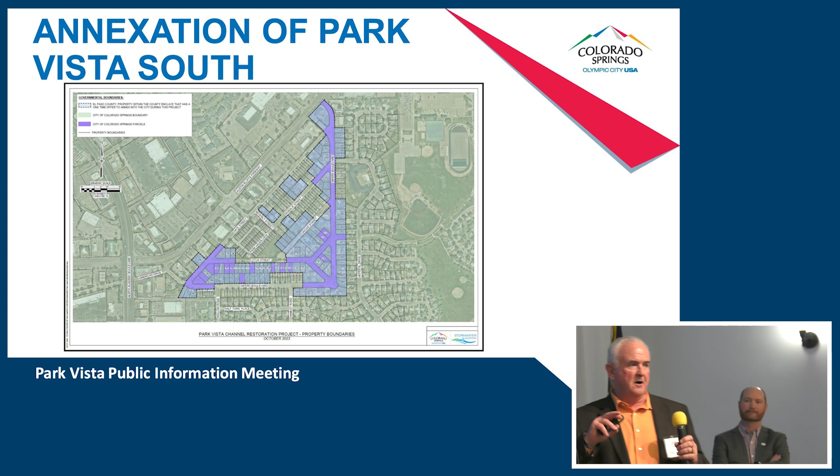This whole area that's colored, that's the enclave area. That's the area that's in the county itself.

So why annex? That's a good question. Typically you annex to get city services, such as police and fire. You get access to city utilities, water, sewer. We will maintain the roads. That's part of the reason why we're annexing it in.

There's possibly other reasons that you may want to annex now versus later. Some of you probably are on a septic system, possibly have a well. Either one of them could go bad and you're forced to hook up to city utilities. If you annex along with the city, we're paying for some of that cost for you instead of you having to pay it on your own.

Again, like I said, I want to mention, it is all volunteer. So don't think we're forcing you into anything that you don't want to do. Contact me and we can walk through the whole process. This is a one-time offer. You've got till September the 1st of next year to decide, and we'll go from there.

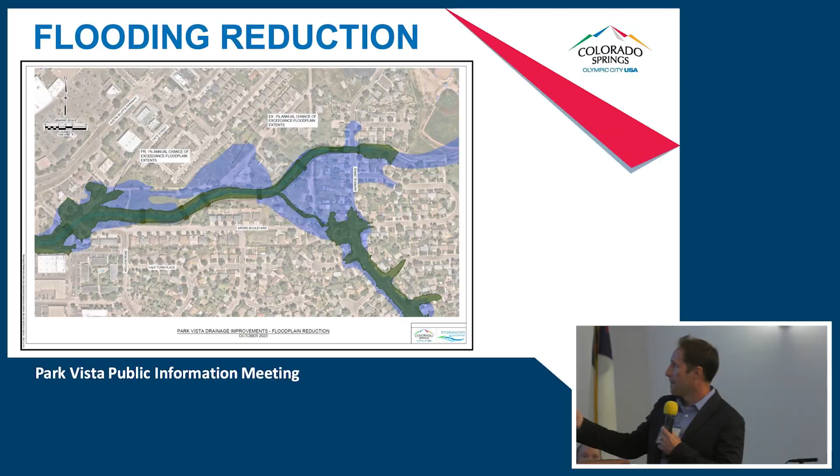That's what I had, and I'm going to turn it over to our design engineer to talk about the design. Thank you.

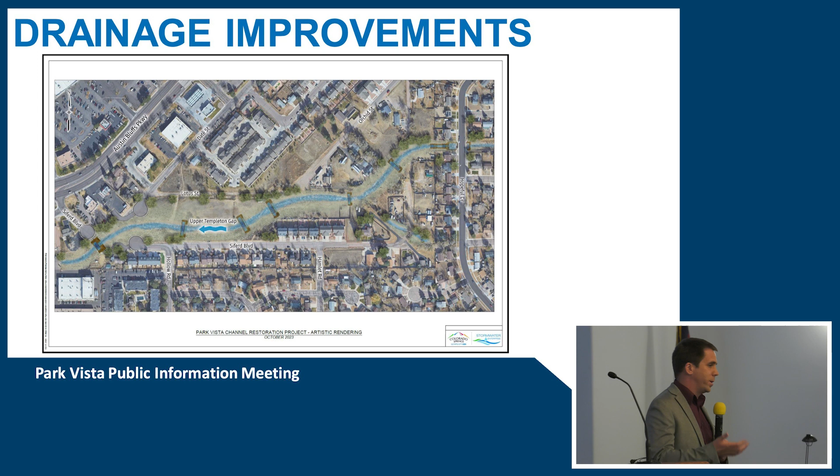So flooding on the roads and stuff, that should help because it'll start moving away as it goes through, but there won't be installation of inlets and storm drain networks in the roads themselves. So we'll be making a constructed channel to show some examples, and then we'll have these concrete drop structures that are really kind of a feature and an aesthetic element, and I'll show some examples of those as well.

We really want to make it a feature and an element and an asset to the community, because it only floods for maybe an hour or two, maybe once or twice a year. So what is it doing the rest of the time?

So we're going to be removing the eroding banks where we have sheer high cliff areas. We know there's a lot of rubble and debris concrete that's just been placed there over time. So we'll be removing all that, and we'll be grading out nice slow banks that you can walk down and vegetating it with natural grasses and natural plants.

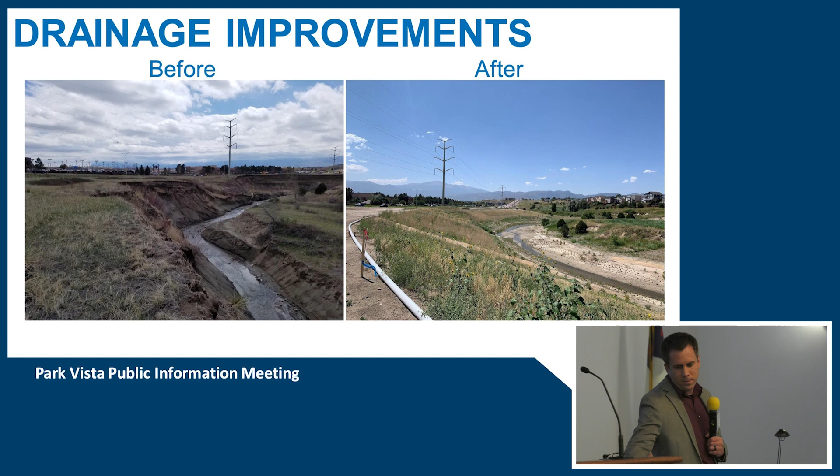So we sculpt them to look like bedrock. We even had a dye added to it, so it changes the color to kind of blend into the environment. So we really try to make it look like a natural featured element.

And then we work with our contractors. Sometimes they get really fun and have some excitement with it, and they'll put tree branches and log stumps to add some variability. So each drop structure is unique. At Cottonwood Creek, they even got really unique and put in the elusive turtles that are in Colorado. So they have fun with it and try to create some Easter eggs for each of those structures as they go through.

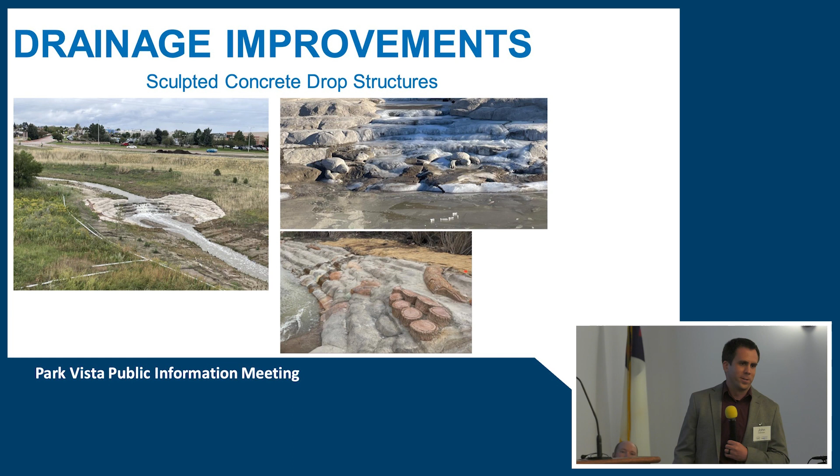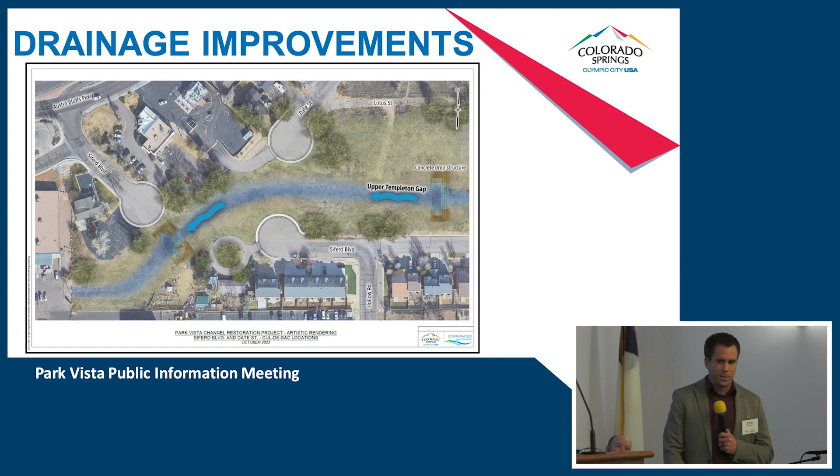At the upstream end, we know that Hopeful Drive, that bridge, is currently undersized. So we'll be opening up that bridge to be a little bit wider. That'll help the flood conveyance go through it and not be backed up. I think we've talked with some property owners that have mentioned they've actually been flooded out a couple times in recent years through there.

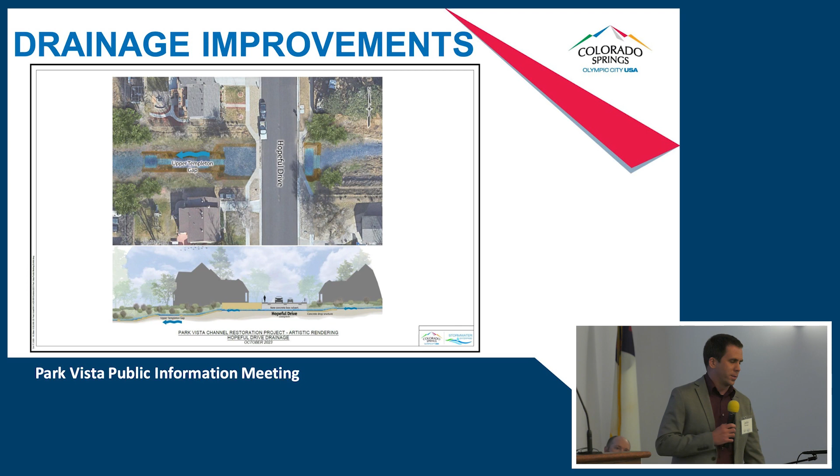So by opening up that bridge and widening it a little bit, we'll be able to pass that flood conveyance through the bridge, and that'll go downstream, so it will no longer be a risk of flooding. That's really what's going to help provide that flood risk reduction and take a lot of people out of the floodplain, so you won't have those flood insurance premiums that Richard was mentioning a little bit earlier.

So we do recognize that a lot of the proposed channel improvements are going through some private property, and our team has reached out to most property owners. If you haven't been reached out to and you believe you'll be affected, feel free to talk to us. If you have been affected and reached out to or sent a letter, we can discuss the options.

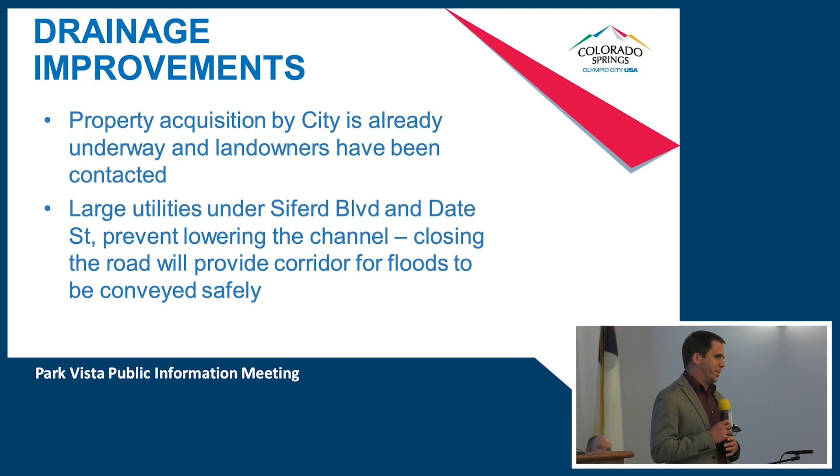The other thing we wanted to talk about is at Siferd and Date Street, there are significant utility lines underneath that road: a 20-inch high pressure gas line, a 10-inch high pressure gas line, and a 36-inch water line. Those are major utilities that are very expensive to relocate, as well as very dangerous, just because they convey a lot of stuff. So that's one of the primary constraints we have.

I know some people have talked about building bridges. That was one of the first things we looked at—really lowering that channel, seeing if we could put a culvert in or some alternative to keep that access open. Given the constraints of those utilities and the cost to relocate them, that was something we just weren't able to do given our budget constraints.

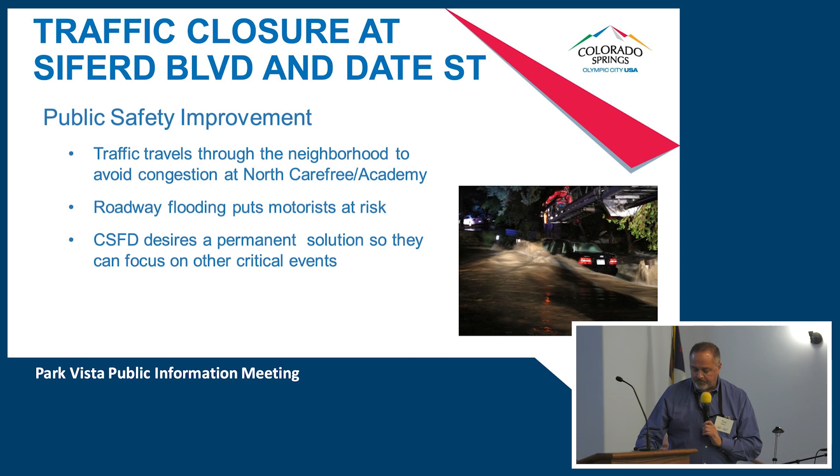The earliest count we could find for the neighborhood was from 1995. It was more of a concern with a traffic signal at Hollow and North Carefree. Researching that, the reason it hasn't been signalized is exactly what's going on today—we have the cut-through. If you signalize that intersection, you're going to get even more. So it's been looked at, signal warrants have been conducted, but we don't want to encourage more cut-through in the neighborhood. There are 1,000 vehicles cutting through, as I mentioned earlier.

If we're talking solutions and the neighborhood traffic management program, we do have a toolbox of solutions. The number one solution to stop cut through traffic would be to close the road, and that's what this project does.

In closing a road, we need to look at what are the impacts. What happens if we do close this road? We need to look at that because are we creating another unsafe situation? Are we going to push traffic over to Hopeful? What does it do to Academy and Half Turn? So those are the things we looked at.

I don't want to seem like we don't know all the answers, okay? So please, you got to give us feedback. Of course, we do our analysis, we look at it, and we make a lot of assumptions, but that's why we do the Q&A, and that's why we do this process, because you guys live here and we don't know it, so we're going to need this feedback. It's a listen and learn for us too.

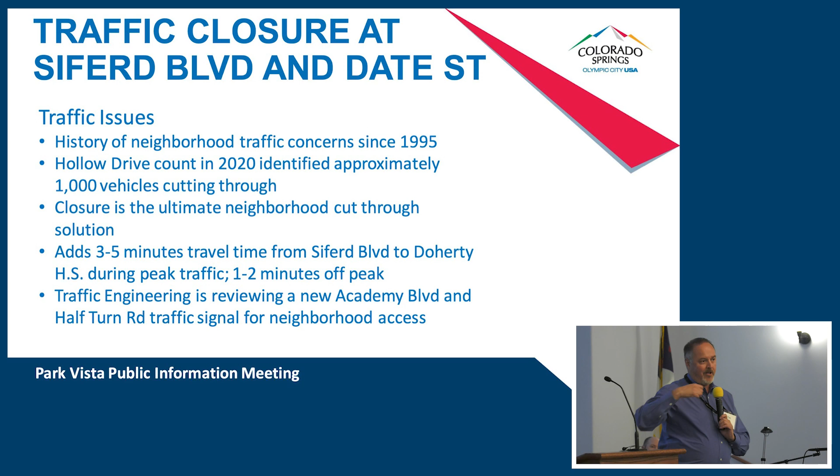And then I mentioned this, that we're looking at Half Turn and Academy when we know there's going to be impact there. Just because we close Siferd, that doesn't mean people are automatically going to stop trying to find shortcuts. We do feel that Half Turn and Hollow will still try to be a shortcut, so people don't go all the way to North Carefree. We need to look at that.

We feel a signal at that location is a good solution to improve safety for the access, because now you don't have the Siferd connection. So now you're going to be going from Academy, Half Turn, and into the neighborhood. And you don't have the protection of that signal. So that's something we want to do with this project.

I don't want to promise it. I can't promise it tonight because we still need to do our investigation of, like, there's a driveway across on the west side of Academy. We got to look at our right-of-way impacts. Are there utilities in the way? Is there an obstacle that would preclude us from doing that? We want to do it. I don't want to promise you, but we do want to do it. We're going to look into that as part of this project.

Could you step aside so I could take a picture of that? I can't see it. Oh, how about I could come to this side. Okay. Oh yeah, and that's right.

And these slides, actually the presentation will be on the project website. Is it on there now? Okay.

This is the map of the area. We did have Hopeful Drive on here also, showing that we are looking at that, but we took it off because last thing we want to do is announce to the rest of the city, hey, this is another shortcut. We're addressing this one, but now there's this other one, and we don't want to have that announced to the rest of the city.

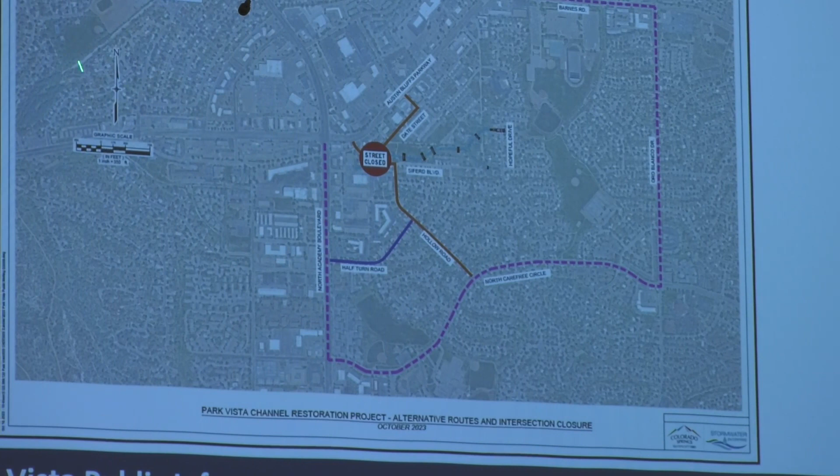And then, of course, this is the cut-through pattern right here. You can see how that is much shorter than going all the way this way and dealing with the signal at this location or going this way here. Even though that's the travel pattern we want the rest of the city to take if they're going to North Carefree.

This project helps us correct that. We feel this signal here will help make it a safer access to the neighborhood.

And I can tell you, we took it off, but Hopeful Drive is on our radar. We've been doing traffic studies on that the last couple years. It meets our threshold for intervention, so this project actually helps support us doing something on there. The bridge on Hopeful Drive is a great opportunity for us to do some type of traffic calming feature.

But let me tell you, regardless of this project, we were coming to address the traffic issues with the neighborhood. I just happened to lose a staff person, actually two staff people, about a year ago. I've rehired, and now there's two projects for us to initiate. One is Hopeful Drive, and the other one is in the Falcon Estates area. I'm not going to tell you that road because I don't want you to cut through on it.

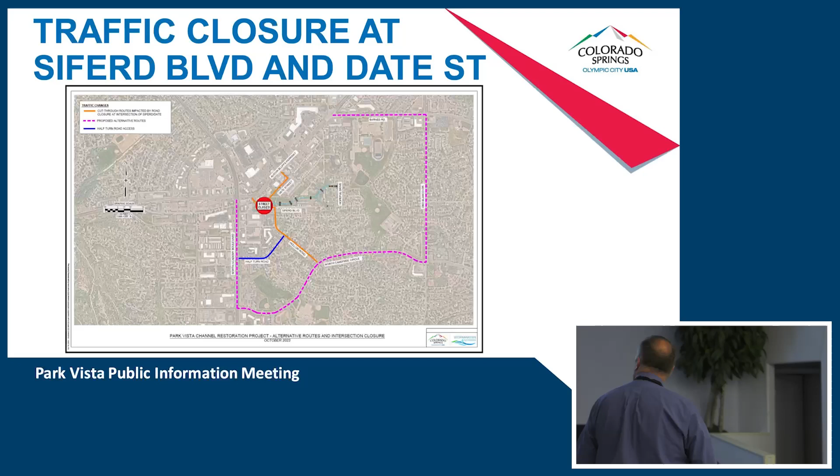Got to be on the website, right? No, not yet. But it's nice that this project is here, and this is a crossing point for us to start looking at that.

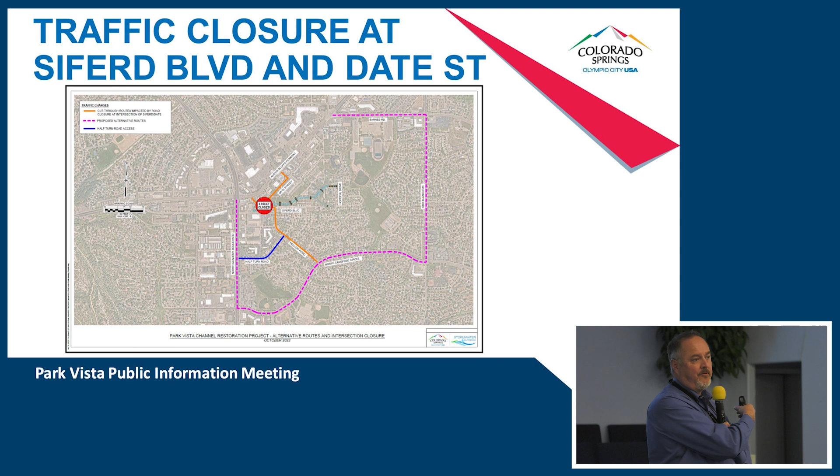Now, when I start looking at Hopeful Drive, and I don't know how many people are here from Hopeful Drive, but there will be a different public process for that. It sounds like we may be ahead of actually this project, because this one's going to take a little while longer, but we're going to start the Hopeful Drive process now. If there's a bridge improvement or traffic calming feature, of course that'll have to wait, but there's other actions we can do to address that. So there is another process coming for Hopeful.

This one really addresses the Siferd. We're trying to make it safe for access to the neighborhood. It's a little bit of inconvenience, but tell us your feedback, because we need to know. I don't live there, and you do, so please share your information with us.

Well, you know what we're looking at. I think I just mentioned most of this. The cul-de-sacs will be city standard. Of course, the closure is the ultimate cut-through solution, because now you've eliminated that opportunity. And then Half Turn—sorry, I wasn't advancing my slides.

Okay, with that, I'll turn it over to Fire.

Good evening, everybody. My name is Lieutenant Eric Rudinger. Sorry I was a little late to the party, had a few things going on this evening. So the reason that Adam wanted us to come and speak, and talk, was we realized that we've got this situation out here.

This area floods, you guys are familiar with that. We had some gates installed a few years ago. Yes, that was something that we took to the city and said, hey, we need some help. I know those gates haven't always been the most user-friendly for all of you, but they have been user-friendly on our side, and I want to explain why.

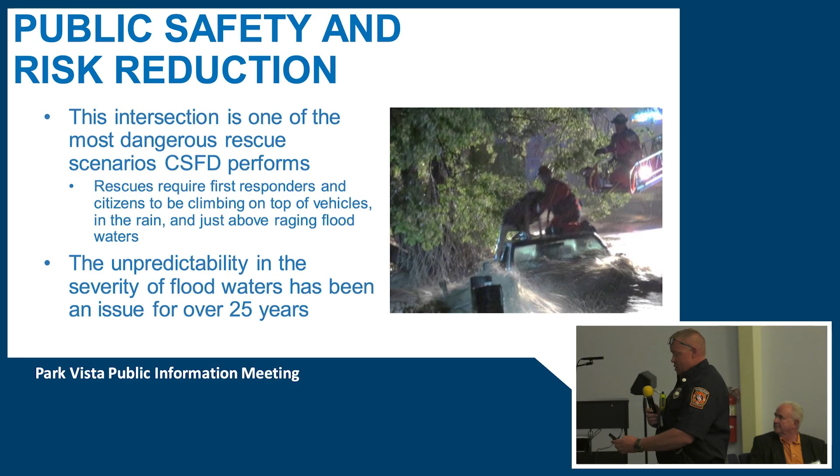So we've had a few critical rescues. This was one of the biggest, where we had the best video on what happened. Some of you may have seen this before. That's actually the Siferd intersection. We have one of our aerial trucks sticking out over the top of the car. In one of the other slides you saw, when we showed up you actually could not see the vehicle at all. There were 2 young ladies trapped in that vehicle, and the water was all the way up and over the top. The problem is we have to put somebody out there—you see our rescuer here—they have to get out in the storm while flooding, on top of metal, and try to get somebody out the downstream side of this vehicle.

Now, here's the problem, I'm going to pause this here. I don't know if I can pause it here. But as they're bringing this person out, what you need to understand is if that young lady falls right now, based on the water, she has 7 seconds—7 seconds for somebody to do something to try and get her out of there. That's not going to happen. Between personal reaction time, trying to throw a rope to that person, with the amount of trees and everything over there, and the velocity of the water, she has about 7 seconds before she gets sucked into the underground culvert for 1,687 feet. I hate to say it, but at the end of the day, nobody's going to come out the other side of that. The probability of surviving is very, very low.

Now, I don't say that to scare anybody. I'm just trying to show how much of a problem this is for the Colorado Springs Fire Department to perform this rescue. I have personally performed one of these rescues, and I've been a part of a couple others to try and get people out. As an officer, I don't even like having to put people out there to train on it. So the best thing for us to do is to eliminate this 100%. That is the only solution we really have at this point. That's where the gates have been nice.

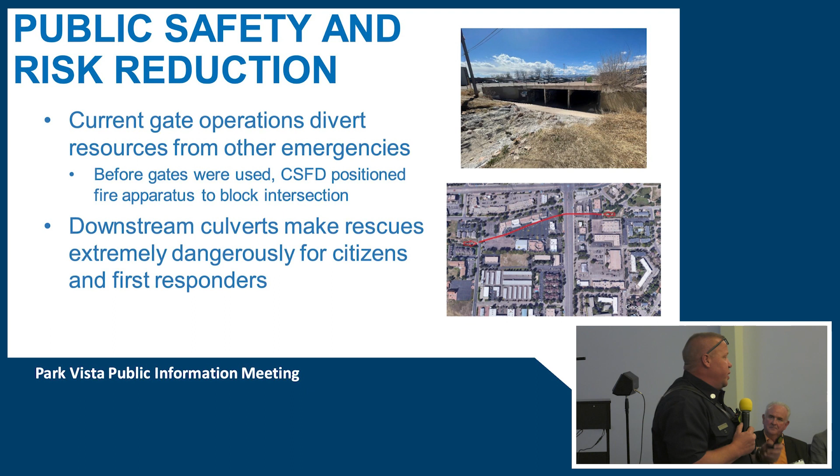I also got to let you know, among all the stuff that ends up there, it's not only a concrete culvert, but we end up having a lot of homeless in there. They try and remove a lot of the stuff that's in there, but the problem is there's a lot of debris. Where I'm going with that is that if somebody ends up in there, the probability of being able to survive is very, very low.

So obviously the best solution—it's been very nice, we've had a lot of open conversations with the city. It's been nice to start seeing this come to fruition. Ultimately, I know it's a bit of an inconvenience, a couple extra minutes, maybe 5 extra minutes during peak time.

But really, at the end of the day, our whole goal is to try and keep everybody safe, the best that we can. And ultimately, this is going to be the best deal for everybody at this intersection from our perspective. So thank you very much.

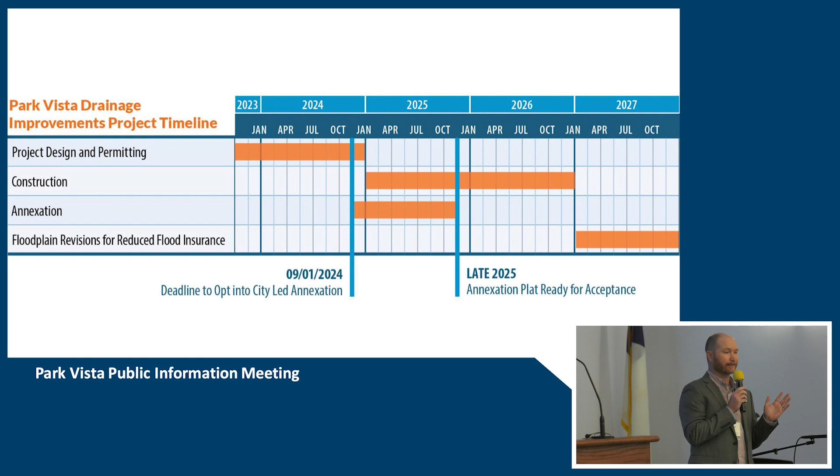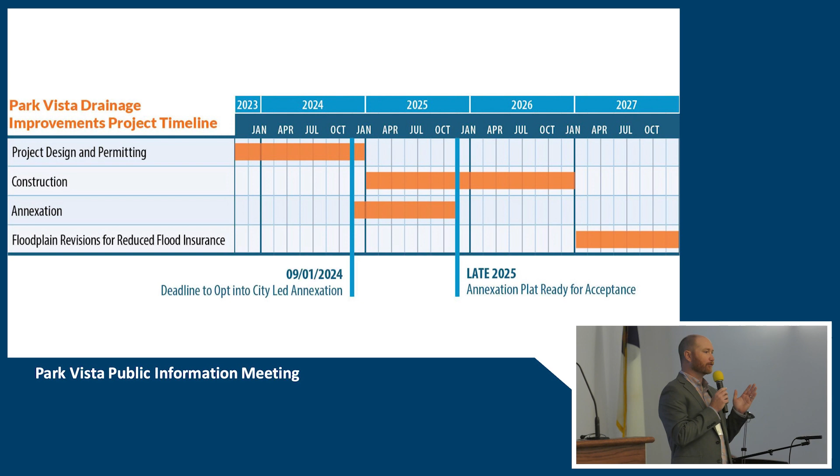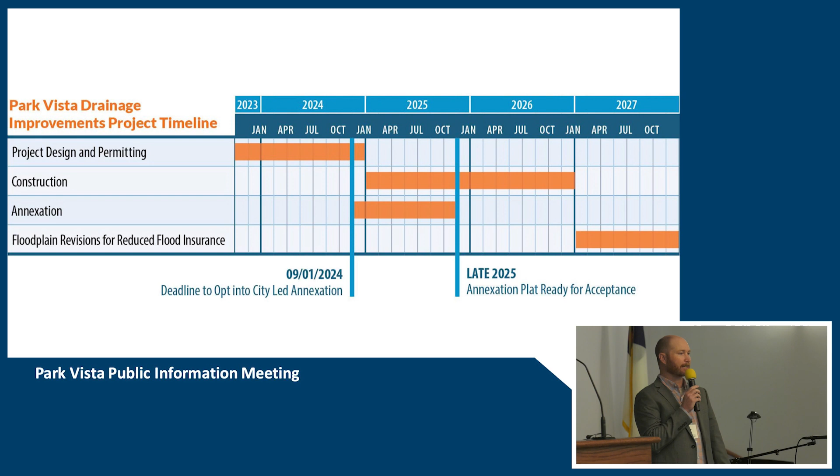I just wanted to give a quick timeline. We haven't talked about how long this is going to take. As you can see here, we have about another year to get design and permitting through for these improvements. After that, about a 2-year construction window. There's a lot happening with this project, and it's a fairly long corridor. Then after that, we'll be doing the floodplain remapping that will help pull residents out of the floodplain. It's a fairly long process, and you can also see the timelines there for annexation deadlines and some of those expectations as well.